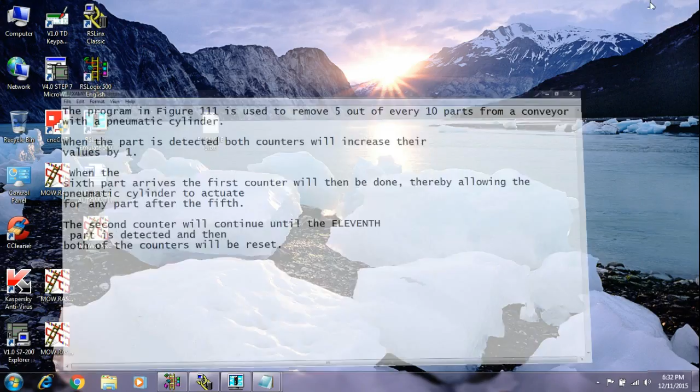Okay, I am not wasting time, I am just starting the program over here. What I will do, I will take a start bit. This is the stop bit. I will take one latching bit. Okay, I will take one memory bit also. So this is our start bit.

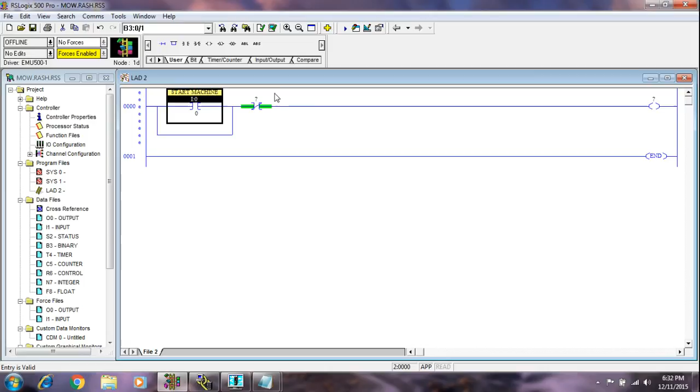This is the address I am giving. This is start machine. Sorry, this is our input stop machine. This is our memory bit. This conveyor is start bit. I am taking one bit over here. This is our conveyor start bit.

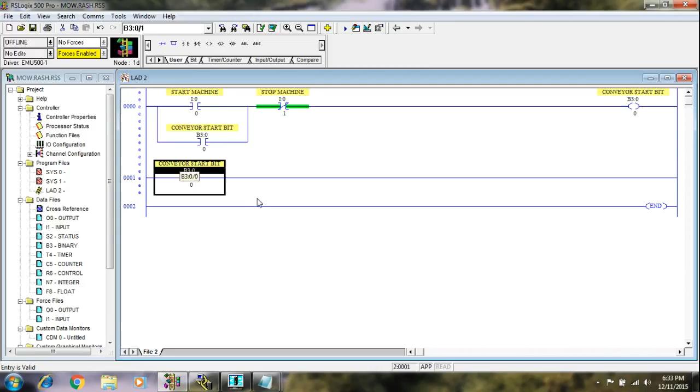When the machine starts, what do we have to start first? We have to start the conveyor, because the part will be detected, or the part will travel from the conveyor. So we have to start the conveyor over here first. So when the machine starts, the conveyor should start. So this is our output. Okay, this is our conveyor.

Now when the conveyor starts, I am giving the output bit of the conveyor. When the conveyor starts, this is our one input, that is part detect. When the conveyor starts, it means the part will travel from the conveyor. So this is our sensor input, so it will detect the part.

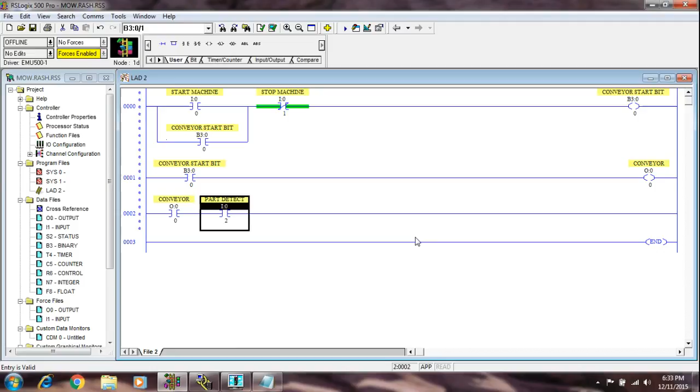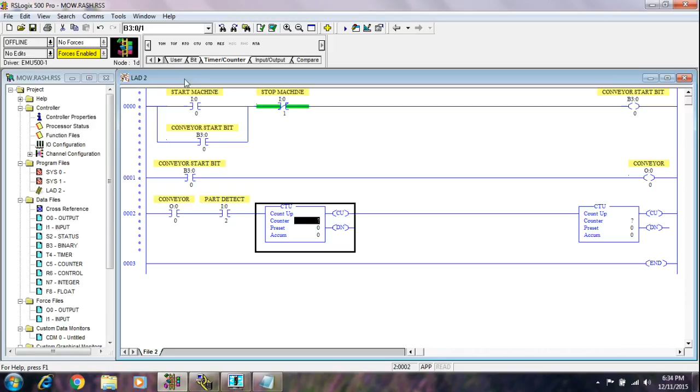When the part detects, it is told in the question that when the part is detected, both counters will increase their values by 1. So I am taking two counters over here. This is our counter 1, and counter 2. Okay, I am taking one latching bit.

This is our two counters. Now we have to give the address for both counters. This is our counter 1. In the question it has told that the first counter will be counting, and after the fifth time, when the counter counts five times, the sixth part arrives, the first counter will then be done.

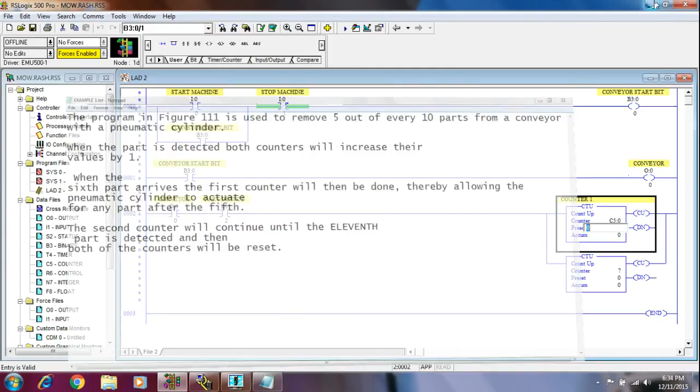But I am not wasting time, I am not taking so many numbers, because then you have to spend more time on this programming. It is simple programming, so I am just taking 3 as the count. In the second counter, I am taking the address, and I am taking the number 5. This second counter is for resetting the counter, and the first counter is for turning on the pneumatic cylinder, just remember that.

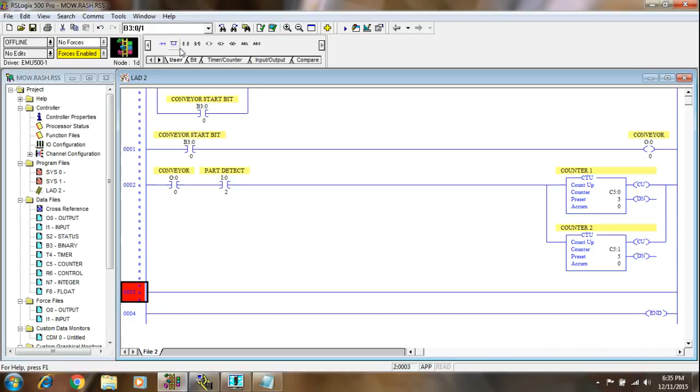Okay, now what we have to do, this is our first counter. Now I am taking one rung over here. This is our counter, I am taking the counter bit over here. I am giving the address C5 colon 0. C5 colon 0 slash done bit. This is our counter, this is our counter 1.

Now I will take one more over here. This is our counter 1 CU. Why I will take it, I will tell you afterwards. C5 colon 0 slash CU. I am taking this because when the done bit comes, the pneumatic cylinder over here, this is the output of the pneumatic cylinder.

When the done bit of counter 1 comes, the pneumatic cylinder is constantly on, or it will be on permanently. But we don't want our pneumatic cylinder to be on permanently. We want that when the part comes after the 3 counting, the pneumatic cylinder will turn on, and after that, when the part goes, it will be off again. When the part comes, it should be on, like this. So that's why I'm taking CU, it will give the pulse and turn off the pulse, give the pulse and turn off the pulse, like this.

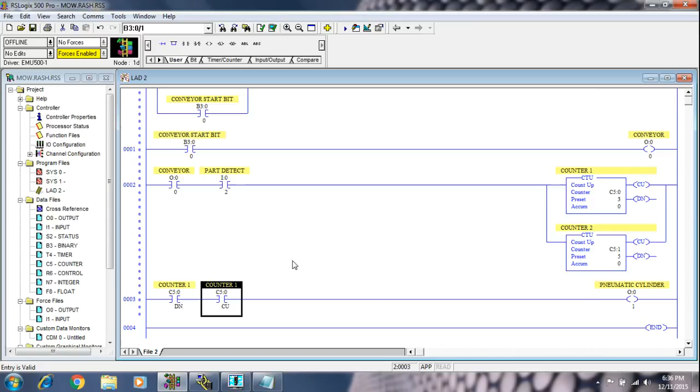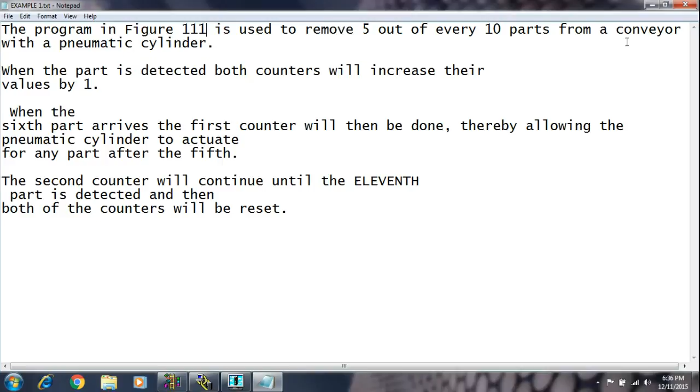Okay, now the third part of our question is that the second counter will continue until the 11th part is detected, and then both counters will be reset. I'm not taking even over here on the second counter 11, but I am taking only 5 parts. So what happens over here?

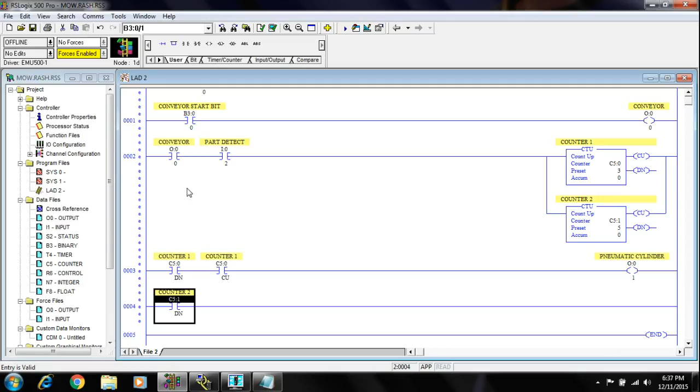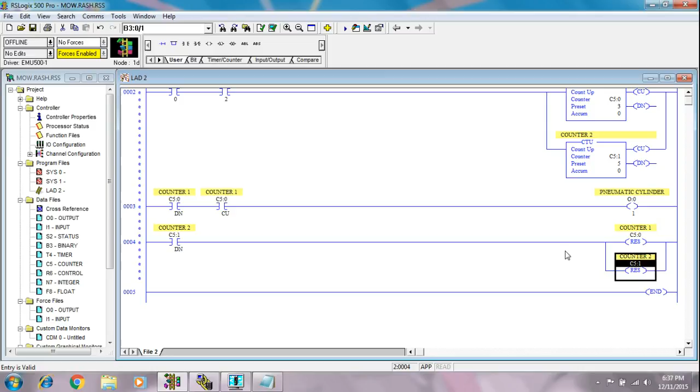When the second counter resets, when the done bit of the second counter comes, in the question it has told it should reset both counters. Okay, I'm taking two bits over here, that is the reset bit. This is our reset bit. I will give the address C5 colon 0 for counter 1, C5 colon 1 for counter 2. This will be reset, but for our safety I am taking one more bit.

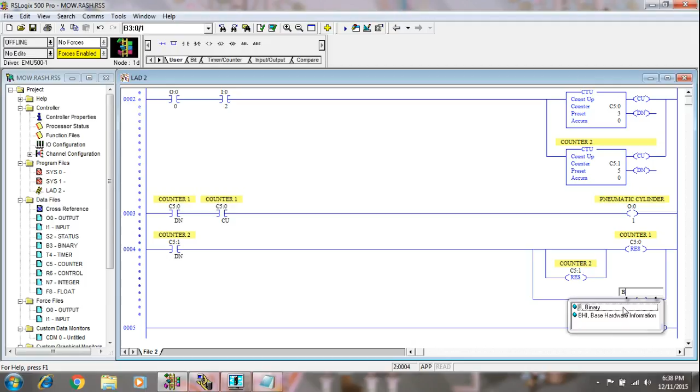For our safety I am taking one more bit. That bit is memory bit. This is for what? I don't want that any pulse will increase my counter counting, so this is for safety. I am taking one bit more over here. This is stop for extra pulse bit. Okay, what we will do by this,

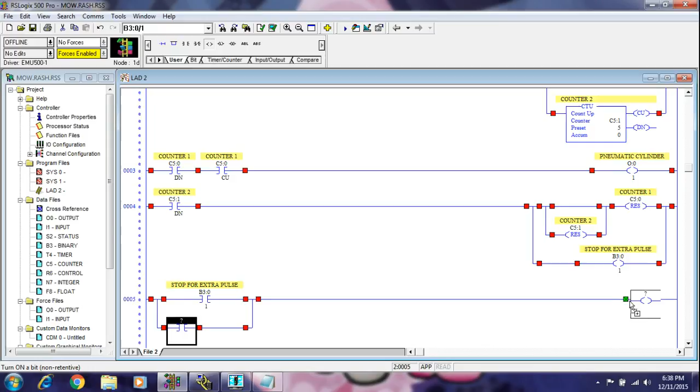I will take one more rung over here. This is our bit, so I will take one more latching. Again I will take one bit over here. This is also a memory bit. This is counter stopper. I will give the pulse. I've given the address over here, so that should be latch, and I will give the NC of this.

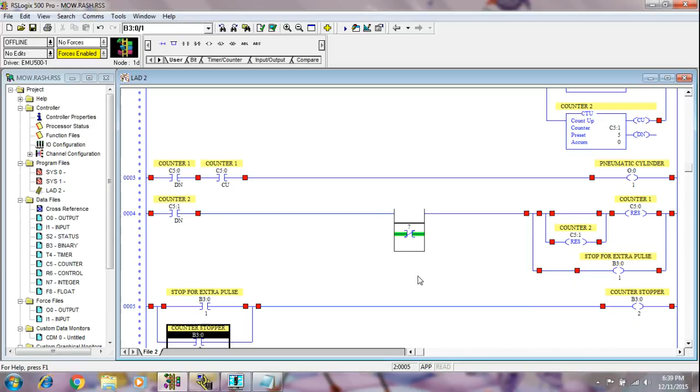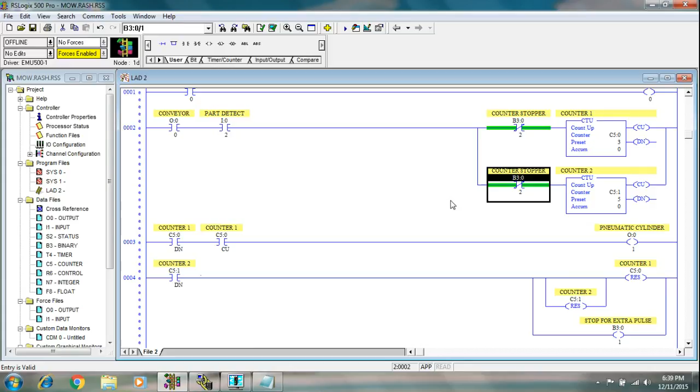I am giving this NC of this bit because I don't want that any extra pulse will come over here and increase my counter counting. So this is for the counter counting, this is for the safety, for the counter counting. Okay, but when the program finishes, we have to unlatch. This means when the machine starts, it will be on permanently, but we have to unlatch. So what we will do, I will take one more timer over here.

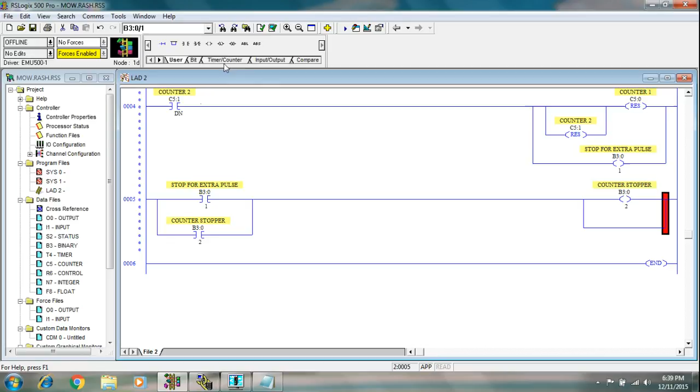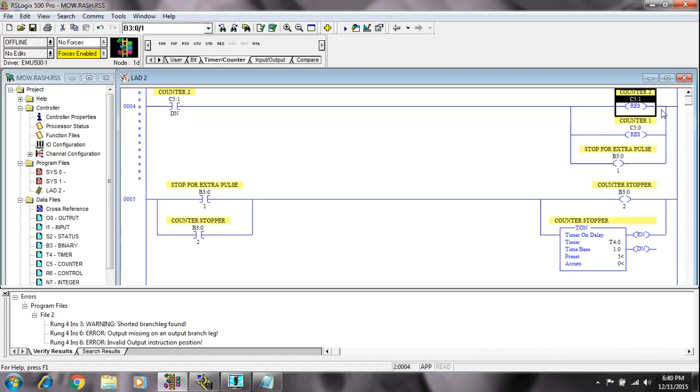This is on delay timer. Okay, when the timer completes its timing, it will reset this bit. It will take 5 seconds. Okay, now our program is finished.

Now I can show you one review, so maybe I am very fast because we don't have so much time to waste over here. So this is our start machine. When the conveyor starts, this is our start bit, this is the conveyor bit. When the conveyor starts, over here the part is detected. When the part is detected, the counter will go up, both counters will start counting at one time.

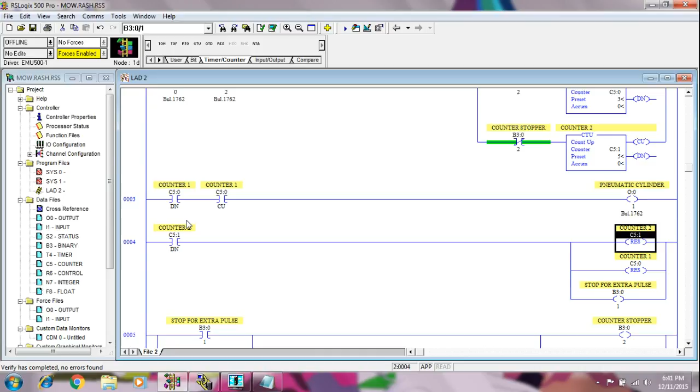When counter 1 reaches the third count, the pneumatic cylinder will start removing the leftover two parts. Because over here it's 5, over here it's 3, it means the extra 2 parts will be removed by the pneumatic cylinder. And when counter 2's done bit comes, it means counter 1 and counter 2 will reset.

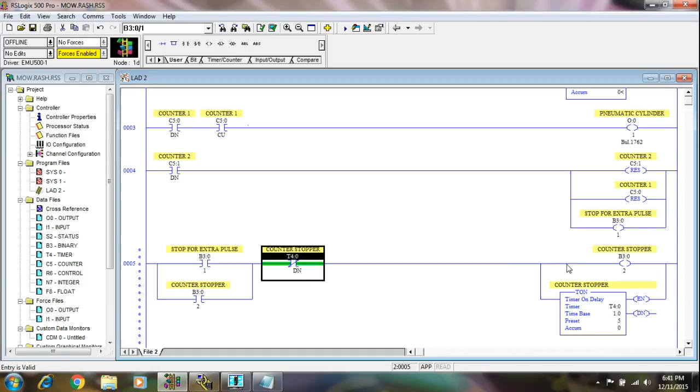This is the extra bit, you will get the pulse over here and latch that bit, and the timer will... oh, I have forgotten one thing. This timer I have taken over here because to reset this bit, so we have to give the done bit T4:0/done bit to reset this timer, and over here I have taken the NC to stop the extra pulse for our counter. So now I will try to run it, and we will check that our program is right or wrong.

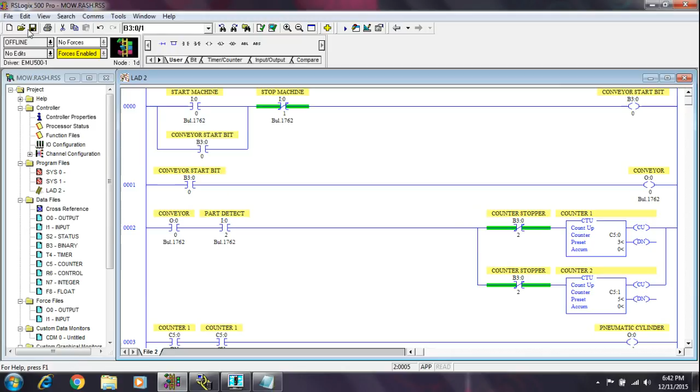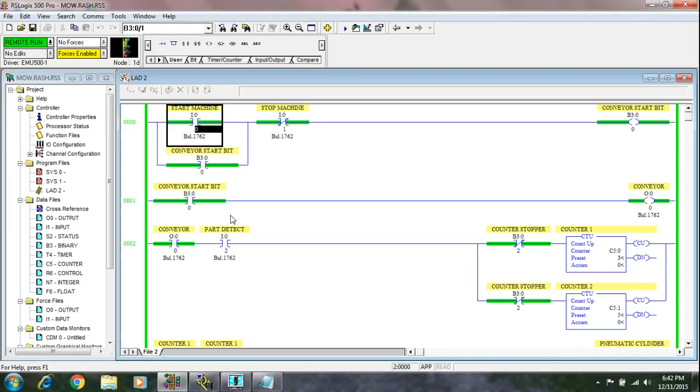Here we go. Now we will start our program, and we will check that whatever we have done is right or wrong. Okay, the question just said when we start the machine, the conveyor should start. Now the conveyor starts, but over here there is no counting yet. Now when the conveyor starts, it means the part will come by the conveyor.

So this is the first part that came over here. See, the first part came, there is a 1, 1 on. Now the second part came over here, this is 2, but see, I can show you this, our part detect is on, but the pneumatic cylinder is not on now. But when the third part comes, it means when there are two parts left, the pneumatic cylinder should come on 2 times. Okay, now I will show removing.

Okay, now the third part will come. Now from the third part it will remove our extra part 1. When the fourth part comes, it will remove again. Okay, when the fifth part comes, now over here, when the fifth part comes, the pneumatic cylinder will be on.

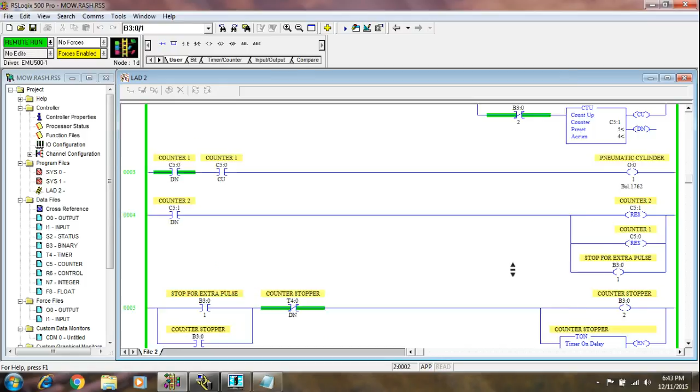And when this counter's done bit comes, it should reset both counters, and you have seen that we have taken one timer that will not give any extra pulse to our counter. Okay, now this is the last pulse I am giving. This is reset over here, there is no extra pulse, and the timer is counting its value. Now it is also reset.

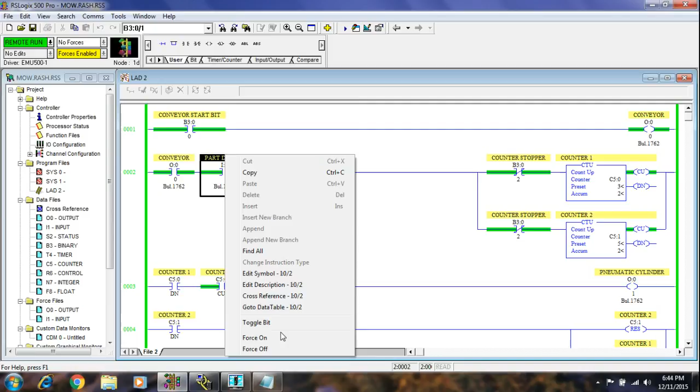If you want to check how it will be reset by the timer, I can show you one more time so you can understand. See, now the third part will come, the pneumatic cylinder starts working. Okay, now the fourth time the pneumatic cylinder is on. Okay, now the fifth time the counter is reset and our timer has started counting.

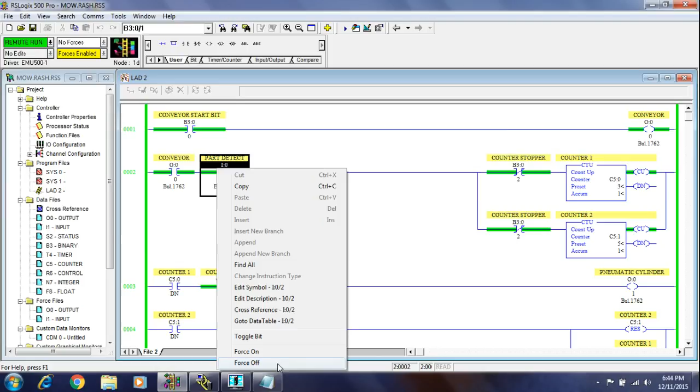See, now this will be reset by this timer. Okay, now it is reset, and every time you can run the program like this. Thank you very much, this is our program.